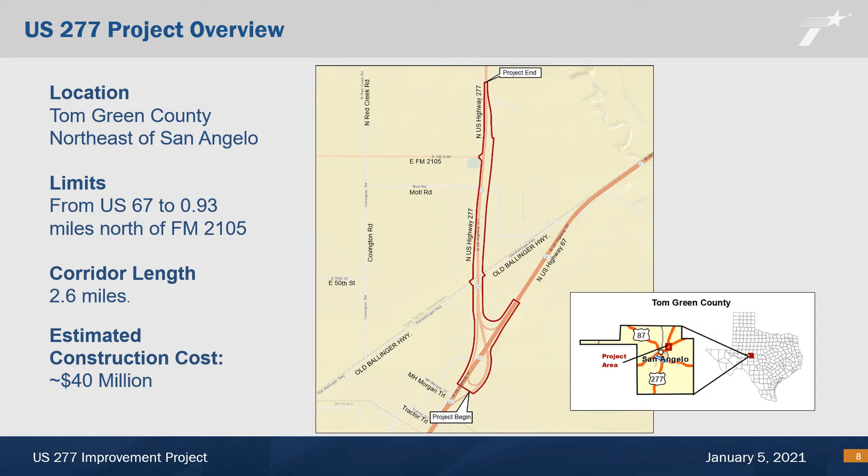The next steps include refining the design and further evaluating environmental impacts. Provided the environmental documents are approved, the project could then move into detailed design and right-of-way acquisition could begin pending project funding.

Prior to the development of the proposed improvements for US 277, TxDOT considered the need to upgrade the highway to current design standards and to improve regional mobility and roadway connectivity. TxDOT also considered the need to add capacity for projected increase in traffic volumes, including trucks, minimize new right-of-way takings, minimize utility impacts where feasible, and avoid or minimize environmental effects. The project is also a part of the proposed Ports to Plains corridor and San Angelo relief route.

The purpose of the proposed project is to improve mobility, accommodate existing and projected growth, and meet current roadway design standards in the US 277 corridor. The proposed project is being developed to address 2 major needs along the project corridor. The current 2-lane roadway is inadequate for both existing and projected growth in the area and does not meet current design standards.

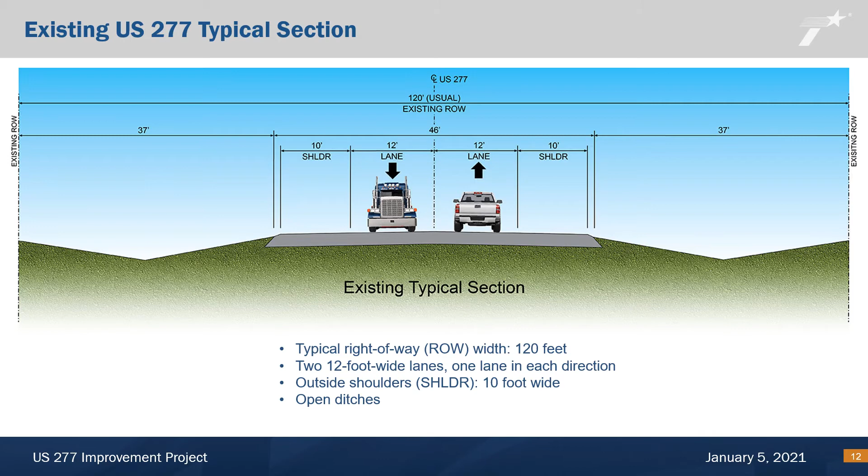A typical section is a technical term for the roadway cross-section design. The existing US 277 typical section is within a 120-foot usual wide right-of-way. The roadway consists of 2 12-foot wide travel lanes, one in each direction, 10-foot outside shoulders, and open ditches.

Level of service ranges from A, free-flowing traffic as shown in blue, to F, which is heavily congested as shown in red. In terms of delays experienced by the traveling public, a level of service A through D is considered acceptable, and a level of service E through F is considered unacceptable. Without any improvements, the US 277 and Old Ballinger Highway intersection would operate at a level of service D by year 2042.

With the proposed improvements, the level of service at US 277 and Old Ballinger Highway is projected to operate between level of service A and B, eliminating traffic congestion in the area.

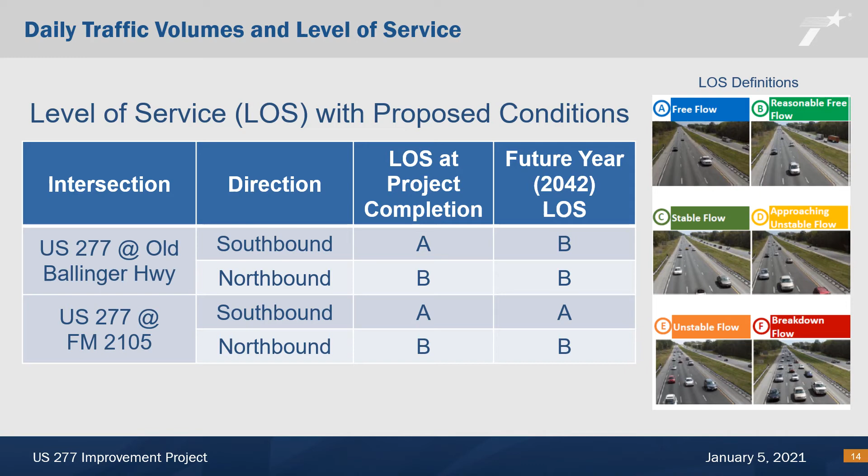The proposed project would widen US 277 from an existing 2-lane undivided rural arterial roadway to a 4-lane divided roadway with grade-separated intersection. 10-foot wide outside shoulders and 4-foot wide inside shoulders are proposed. The project includes frontage roads for access to cross streets and adjacent property. The maximum proposed right-of-way width would be 400 feet, requiring additional right-of-way at various locations.

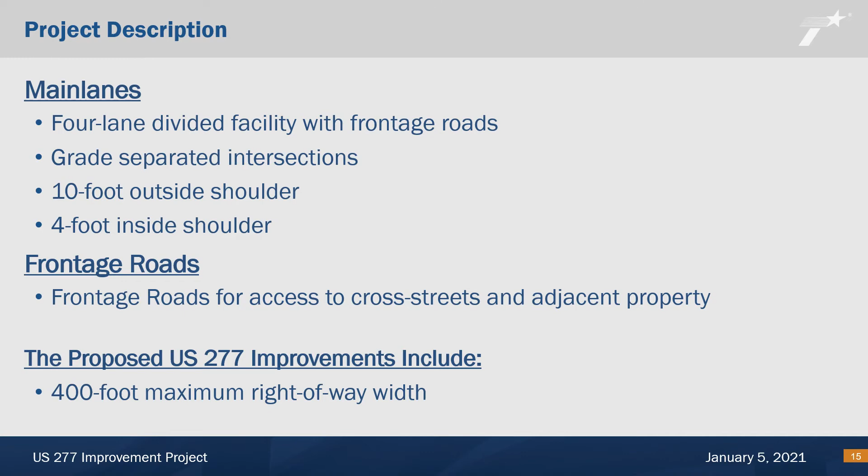This slide shows the proposed typical section. The proposed maximum right-of-way width would be 400 feet. The proposed roadway would have 4 main lanes, which include 2 12-foot wide travel lanes in each direction, 10-foot wide outside shoulders, 4-foot inside shoulders, and one-way frontage roads with 2 12-foot wide travel lanes with 4-foot inside and outside shoulders.

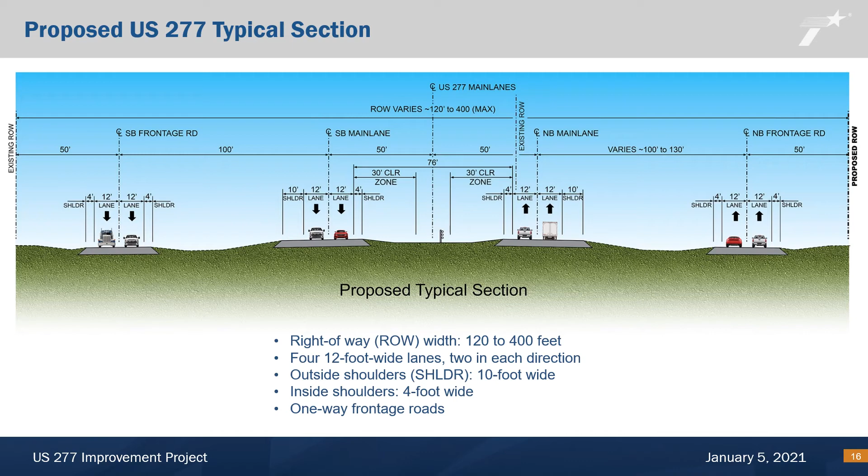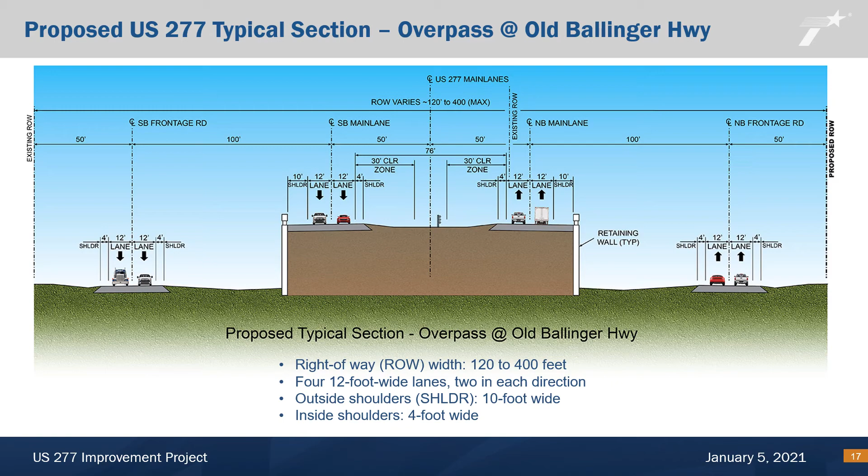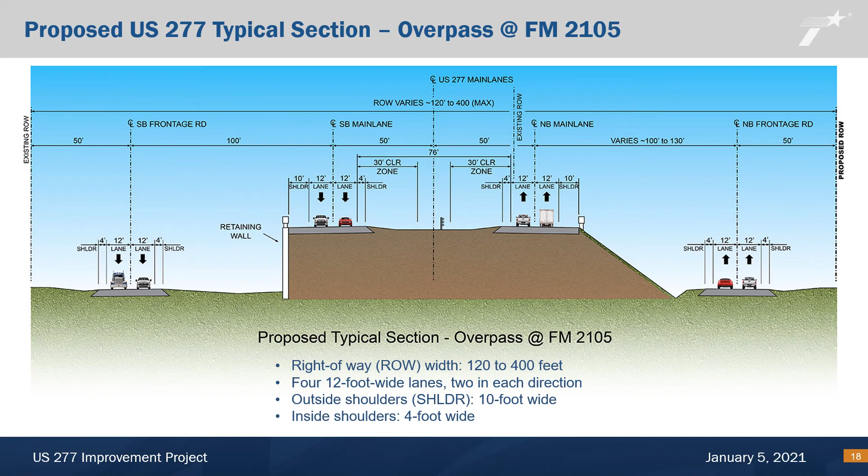This slide shows the proposed typical section for the grade-separated sections at the Old Ballinger Highway. This typical section shows retaining walls on both sides of the grade separation. This is another proposed typical section near the FM 2105 overpass, showing a grade separation with the retaining wall on one side and standard slope fill on the other. Lane and other widths are the same as the grade-separated typical section with retaining walls on both sides.

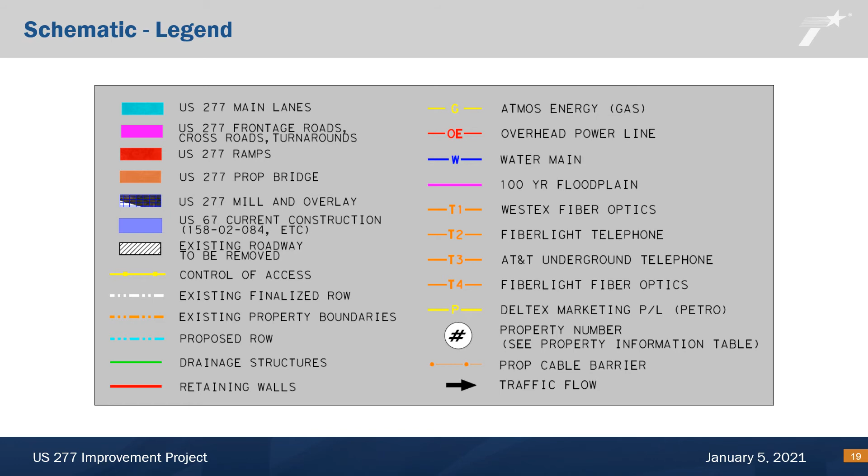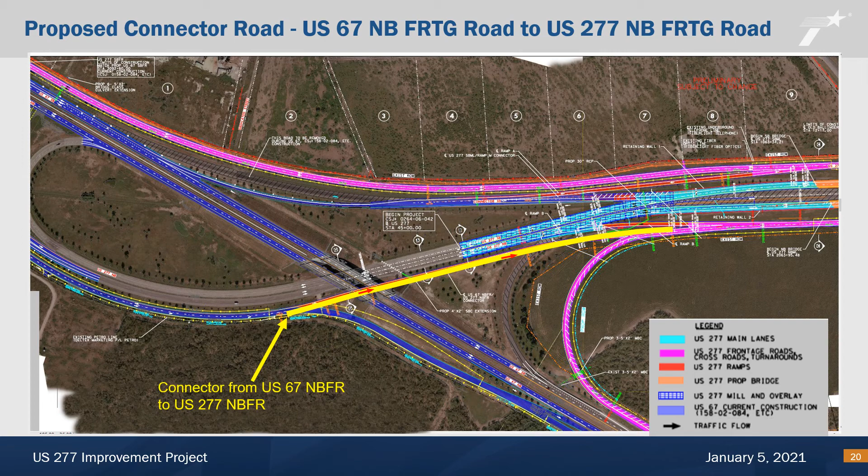The existing US 277 currently crosses the old Ballinger Highway and the South Orient Railroad at grade. The proposed project would have US 277 main lanes crossing over and above the old Ballinger Highway and South Orient Railroad. US 277 would also have one-way frontage roads going northbound and southbound that will intersect with Old Ballinger Highway and cross the railroad at grade.

The intersection would include U-turns and 14-foot multi-use outside shoulders to accommodate bicycle and pedestrian use. The intersection would include horizontal and vertical clearance to accommodate large vehicles and agricultural equipment.

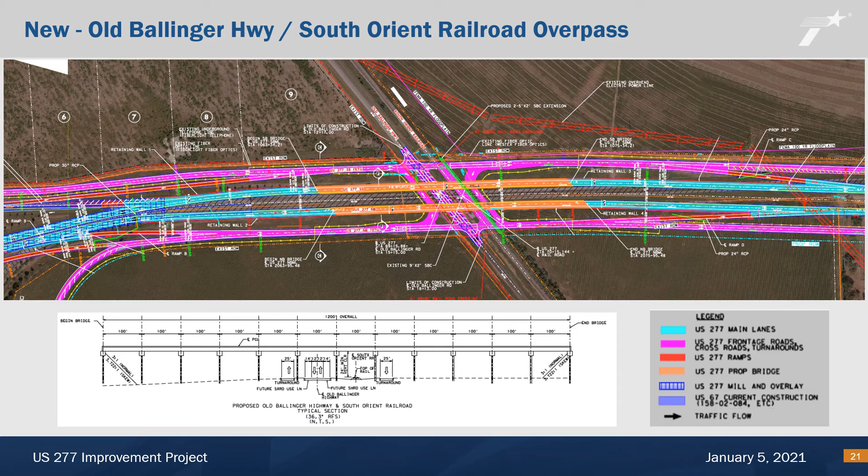Similarly, existing US 277 currently crosses FM 2105 at grade. The proposed project would have US 277 main lanes crossing over and above FM 2105, creating a grade-separated interchange. US 277 would be carried over FM 2105 and would be connected with new frontage road.

The intersection would include U-turns and 14-foot multi-use outside shoulders to accommodate bicycle and pedestrian use. The intersection would include horizontal and vertical clearance to accommodate large vehicles and agricultural equipment.

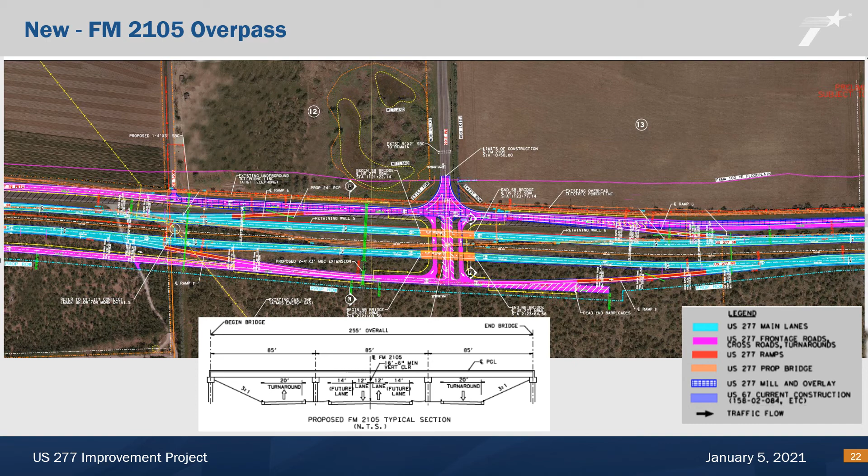The project team is in the process of identifying and evaluating potential environmental impacts that could occur as a result of improving US 277. Resources being reviewed include archaeological resources, non-archaeological historic properties, community impacts and environmental justice, air quality, biological resources including threatened and endangered species and habitat, waters of the United States including wetlands, floodplains and floodways, hazardous

materials, and traffic noise. The project would be designed to avoid or minimize impacts to the greatest extent practicable. Technical reports documenting the analysis and conclusions of these studies will be available for review once completed.

Approximately 36 acres of additional right-of-way would be required for the proposed project. No residential or commercial displacements are required. All right-of-way acquisitions will be in accordance with the Uniform Relocation Assistance and Real Property Acquisition Policies Act of 1970.

Please consider sharing your comments about the project. You can download a comment card from the TxDOT website and submit it on the website via email or mail. You can also submit your comment with a voice message to TxDOT by calling 325-947-9202.

The TxDOT website contains all materials presented in this virtual public meeting, including this presentation, a comment card, and the project schematic layout. The schematic layouts provide a more in-depth look at details such as existing and proposed right-of-way as well as median breaks. These files are large and may require more time to download than the other project materials.